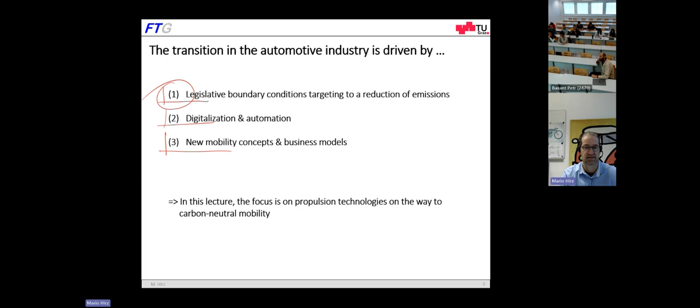Besides that, we have digitalization and automation. So automated functions, autonomous driving cars, for example. I will not touch that today. And the third factor is new mobility concepts. So new ways how to do transportation, people and goods transportation. And this changes a lot in automotive business. But today, I will focus on the propulsion systems. And this change of propulsion systems is driven by legislation. And I would like to start with this topic.

When we look at exhaust emission legislation, we can distinguish between the so-called harmful exhaust emissions. These are emissions that are bad for the health, bad for the environment in general. And then we have the greenhouse gas emissions, CO2. CO2 is not, in fact, harmful for the health, so we breathe it. So it's a part of the biocycle, but it leads to global warming, and therefore it's also restricted.

Perhaps some words in the beginning about the harmful exhaust emissions. Here we have hydrocarbons, we have carbon monoxide, we have nitrogen oxides, and we have particulate emissions. These emissions are initially targeting combustion engines because combustion engines produce such emissions. But in the latest European legislation, they also target all cars, so also electric cars.

But of course, electric cars have no hydrocarbons, right? They have no exhaust, they have no particulate, no carbon monoxide or nitrogen oxides. But electric cars also have particulate emissions, tire wear, and brake emissions. And this is covered with the new legislation, the Euro 7, this time.

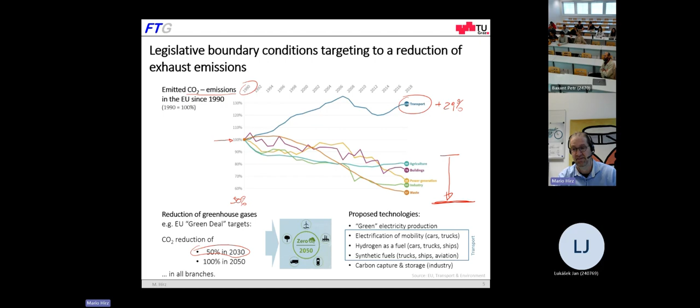And when we look at the transportation sector, we have about 5% railway, about 11% aviation, 11% ships, so naval industry, and about three quarters is road transport. And in road transport, a little bit less than half is the heavy-duty vehicles, so the trucks and buses, and a little bit more than half is the cars and motorcycles.

In that way, in a worldwide consideration, when we multiply the 23% with the 74, we have about 17% of all CO2 emissions coming from road transportation, and here a little bit more than half from cars and less than half from commercial transport.

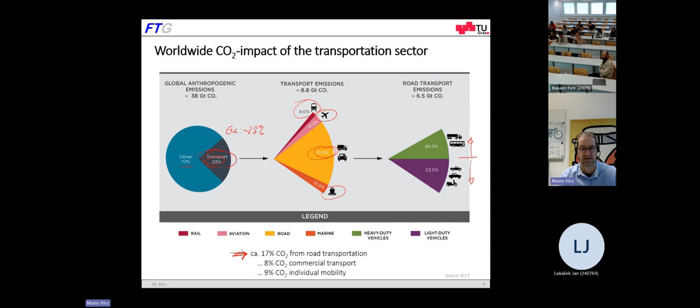Politics now applies measures to reduce the CO2 impact, and this is done by so-called fleet emission targets. What does it mean? This means that the fleet of cars which are sold in a year as new cars have to be on average below a certain threshold value. And as you see, for all markets worldwide, we again have a decreasing trend here. So even the United States or China have this, but the most strict regulation at this time we have in Europe with 95 grams CO2 per kilometer driven.

What does it mean? 95 grams CO2 per kilometer means about 4.1 liters fuel consumption gasoline or 3.6 liters fuel consumption diesel fuel per 100 kilometers. How this is calculated, I'll show you later. It's just a simple factor used here.

For 2030, we have the 59 grams target, and we see that these values are really small. So 2.6, 2.3 liters per 100 kilometers is not easy to reach with an average car. And this means we need electrification. So a certain share of cars have to be electrified to reach the target.

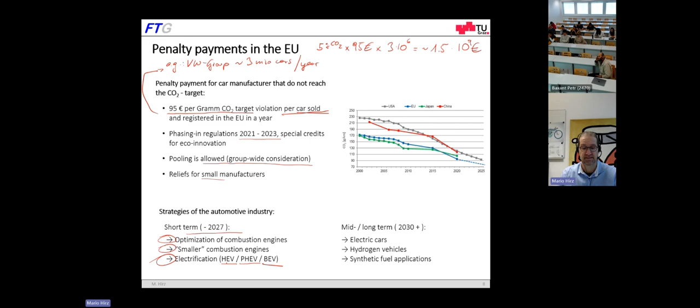And a main step is electrification. We have the HEV, the hybrid electric vehicles. We have the PHEV, the plug-in hybrid electric vehicles, where the battery can be charged on the grid, so you can plug in. And we have battery electric vehicles. These are the main strategies of the car manufacturers, so that the total fleet of their cars on average can reach this 95 gram target.

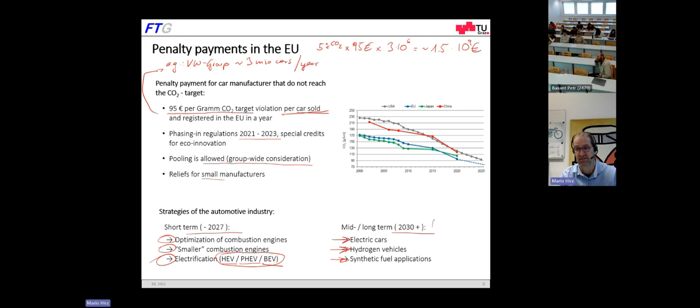On the long term, when we look at 2030 and beyond, there will be a significant move to electric cars because for zero CO2, electric cars will probably be the most efficient way. I will show you a diagram for that later. But we have alternatives. We can also use hydrogen-driven vehicles, and we can use synthetic fuels if the legislation allows this. I will treat all 3 technologies in my presentation today. Okay, so far the legislative boundary conditions in Europe.

Next, I would like to look into propulsion technologies. Before I start with that, I would like to talk about some basics. On this slide, we see the driving resistances of a car. You know that from physics, I guess. We have the braking force; I come to that later when we brake the car. We have the rolling resistance as a function of the rolling resistance factor and the mass of the car. We have the air drag as a function of the size of the car, the aerodynamic factor, and the speed squared. We have the climbing resistance when we drive uphill, and the acceleration resistance when we accelerate the car.

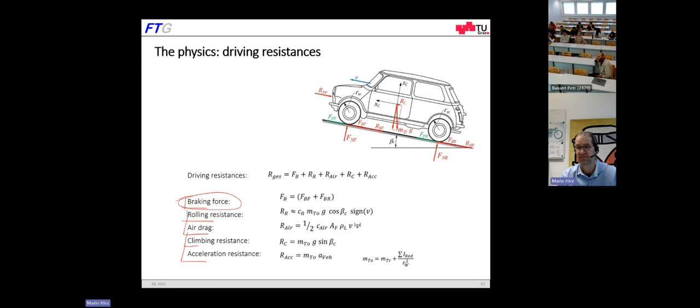Some of these resistances can be recovered during braking. When we brake the car, we have the possibility to recover some of that energy in case we have electric drive. Here is an example: a simulation of the driving power demand when we drive a standard car uphill with acceleration. We have the rolling resistance, the air drag, the inclination resistance for uphill driving, and the acceleration resistance. And in case we have a hybrid or an electric car, we can do electric braking.

And this is called recuperation. In this recuperation, the electric motor is operated as a generator. It produces electricity, and this can be stored in the battery. This significantly increases efficiency. So this is one reason why hybrid cars typically have a lower fuel consumption than cars with combustion engine only.

What happens with the energy in case of combustion engines only? The brakes dissipate the energy as heat to the environment. So it's not used anymore. It just heats the environment because of the friction brakes. But in case of electric powertrain components, the electric motor switched as generator and the battery, we can recover that energy. This has an important influence on the efficiency.

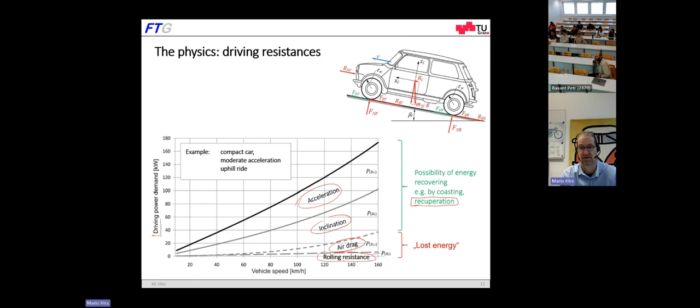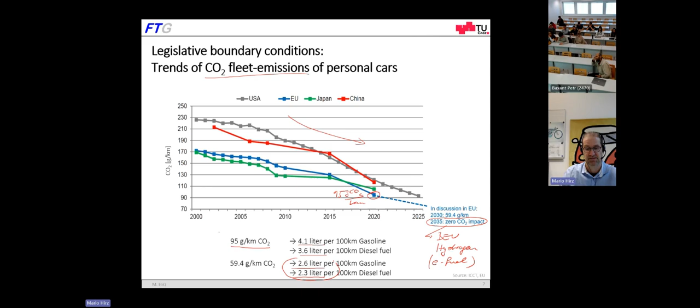So combustion engines are in that way a kind of limited technology that will not be able to reach zero CO2 emissions. In addition, we have the local exhaust emissions, I talked about that, and today the direct dependency on crude oil.

What about electric drives? Electric drives are much more efficient. I will show you later that we have a total efficiency in the range of about, let's say, 65 to 75% in total. That includes the charging and discharging losses of the battery, the electric motor, the gearbox, everything. And with that, we have a significantly higher efficiency potential than combustion engines. We have no exhaust emissions, and it's a quiet technology with high driving comfort.

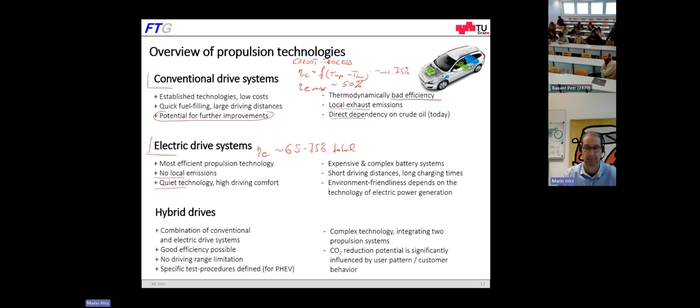The challenge with electric cars is the complexity of the battery system. I will show you later that the battery system is the most expensive part in an electric car. It requires high effort for production, and this is a challenge also in terms of CO2 emissions. We have shorter driving distances, longer charging times,

and as a very important factor, the environmental friendliness depends on the technology of electric power generation. When we charge the electric car with hydropower or solar energy, we have a very low CO2 impact. When we charge the car with coal power, we have a high CO2 impact. So it depends on how electricity is produced.

Finally, the hybrids. The hybrids are a smart combination of electric drive and combustion engine. As I mentioned before, a good efficiency is possible. We have no driving range limitation, and there are some specific test procedures defined in legislation for plug-in hybrids.

On the other hand, it's relatively complex, and the CO2 reduction potential is significantly influenced by how the car is used. In city traffic, the reduction potential is higher. When we only drive on highway with constant speed, there is nearly no CO2 reduction potential for hybrids.

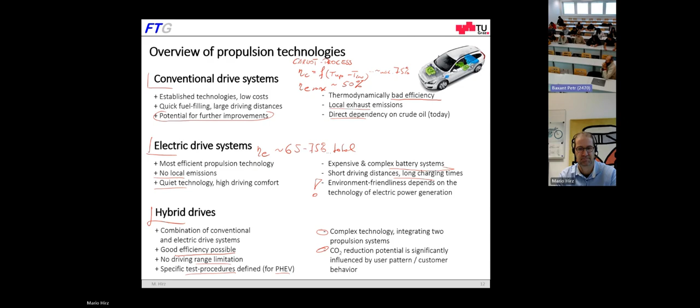In the serial hybrid, the combustion engine drives the electric generator, produces electricity, and this then drives the car. The car is driven by electric motor only. In the parallel hybrid, combustion engine plus electric motor drive the car. And we have a certain flexibility to operate combustion engine, electric motor, or both.

In the power split, it's the Toyota system, more or less. So Toyota has introduced that, very successful with the Prius, but in the meantime, they have it in different models. Here, we have a planetary gearbox that can switch very quickly between input and output, so from input from combustion engine or from electric motors. The advantage of this system is that it can very quickly vary the different energy sources for driving the car.

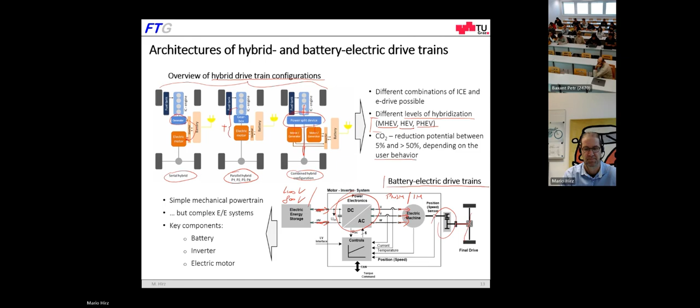But anyway, because of this limited speed range, we need a gearbox, right? So in a car with combustion engine, we always need to shift gears to be able to drive very slowly, but also fast on the highway. In addition, we need a clutch system here to start driving.

Why? Because at idle speed, we have a certain rotation of the crankshaft, but the wheels stand still when we stand still with the car. And to start driving, we need some friction mechanism that bridges that speed difference. Every time when we operate the clutch, we have losses. This is for starting driving, but also when shifting a gear. This is very different with the electric motor. The electric motor, as you know, as electrical engineers, delivers high torque at zero speed.

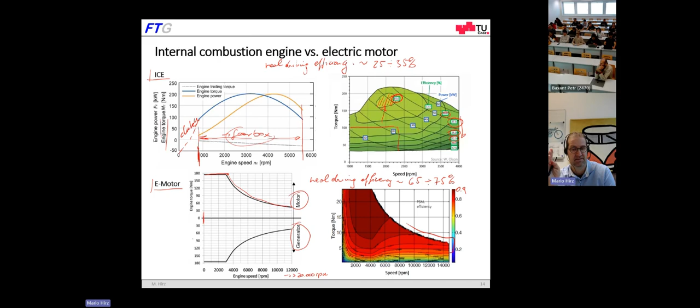In electric real driving, the efficiency of the complete powertrain, we can reach about 65 to 75 or even more percent. So it's about 2 to 3 times better than with combustion engines.

Another aspect when we compare combustion engine and electric drive is the mechanical complexity. So in combustion engine drive, we have a high number of mechanical components, about, let's say, 1,200 to 1,500 parts in the drivetrain. This includes the combustion engine with all the components, the crankshaft, the piston, conrod, valve train, oil pump, housings, and so on. It includes the gearbox with the bearings, the gear wheels, the shafts, the fuel system, and the exhaust system. So a high number of mechanical parts.

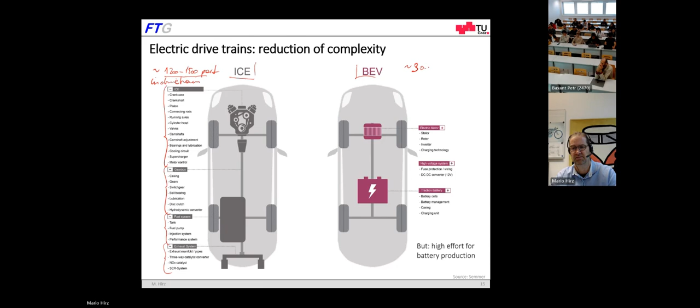For the battery electric car, we have about, it also depends on the complexity, 300 to 500 parts. So a significantly lower number of parts, which reduces mechanical complexity. We just have the electric motor with inverter, a simple gearbox, the battery system, the charging system. But, and I will come to that later, the battery is a highly complex component here. I will show you later.

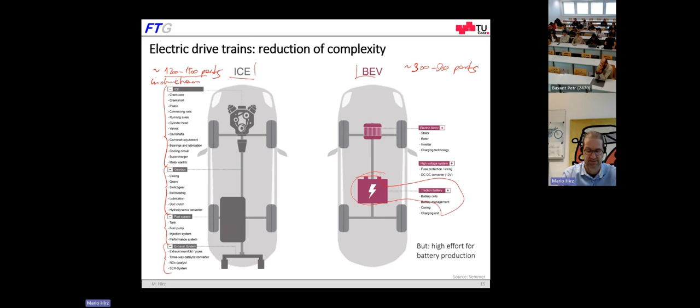So the combustion engine driven car will be a bit more expensive because of more complex technology for exhaust emission reduction, so that a difference of about 10% or something like that remains in 2030. This is only production costs. Of course we have other costs like maintenance, service, energy costs, and so on, which make battery electric vehicles very competitive in the near future.

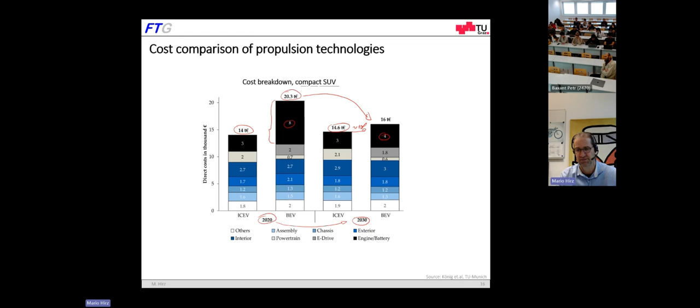Just to show you this expensive and complex battery system, this is an example of the Porsche Taycan, a luxury sports car. Here we have a battery of about 94 kilowatt hours energy storage capacity. It's an 800 volt system. We have here 33 modules with 12 cells.

I just want to show you the complexity. So we have here the modules with the cells. We have the electric connection, high voltage connection. We have a battery management system, a very complex control system of the battery. And you see here, we have extensive protection.

This is one disadvantage of the lithium-ion battery. They burn very well in case of an accident, for example. And therefore, we need massive protection. So these are aluminum beams. Also here in between, we have underbody protection from the lower side. We have different covers. This is the cooling system here visualized. So it's a complex, very expensive system that is represented in such an automotive battery.

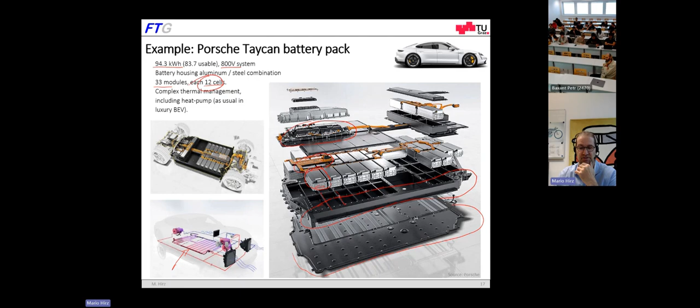Regarding battery systems manufacturing, we have another situation that is important, namely the supply of battery cells. About 50 to 60% of the price of such a battery is only the cells. So these are the cells which are here in the modules, and they are very expensive to produce. So more than 50% of the battery is only the cells.

And when we look at the supplier companies that are able to deliver automotive battery cells, we see there is a small number of them. The largest one is CATL, a Chinese company with more than 25% market share. LG, Korean, with also about 25% market share. So these two have 50% market share. Then there's Panasonic, Japanese, Samsung, Korean, SK, Korean, BYD, Chinese, and some others.

And when we look at this, we have here 5 or 6 manufacturers which have more than 80% of market share. And what's also visible, all these companies are Asian companies. So we do not have European companies for battery production. And this is a very bad situation. So we have to import this know-how to Europe. In the meantime, these manufacturers also have cell production in Europe, but most of the cells are imported from Asian countries. So this has an economic impact.

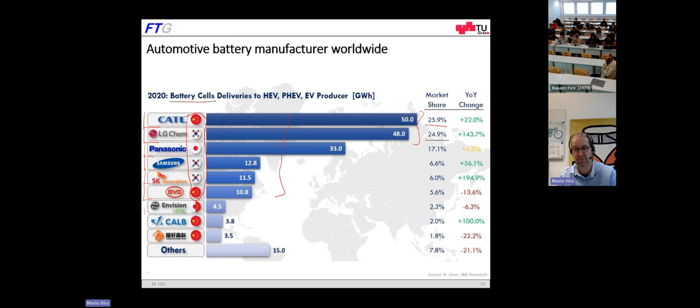Let's look at the CO2 emissions. I want to compare the different technologies in terms of their CO2 emission impact. And here we have to distinguish between 2 types of CO2 emission: the so-called well-to-tank emissions and the tank-to-wheel emissions. How does it look? When we have a car with a combustion engine, here on the upper line, we have tank-to-wheel emissions because we drive the car and we burn the fuel. I have shown you in the introduction how it works, where it comes from. So when we burn hydrocarbons, we have a CO2 impact.

In addition to that, we have to consider the different steps of production of the fuel, right? So we have the production of crude oil, we have the transport, we have refining, and the transport to the gas station. This is the so-called well-to-tank emissions. Just to give you an average, the well-to-tank emissions for gasoline and diesel are about 15 to 20% of the tank-to-wheel emissions. So this is the effort for production of fuel.

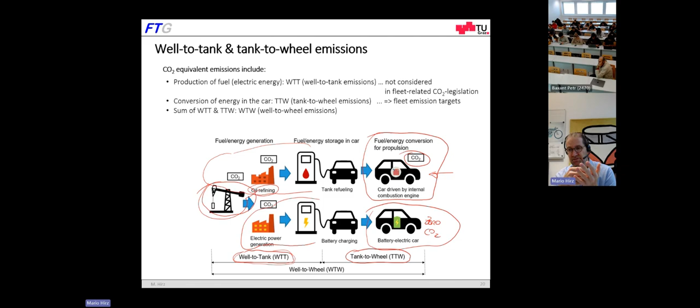In case of an electric car, we have 0 CO2 tank-to-wheel. That's clear because an electric car has no exhaust, right? But we have well-to-tank emissions, and this is influenced by how the electricity is produced. I will come to that in more detail on the next slide.

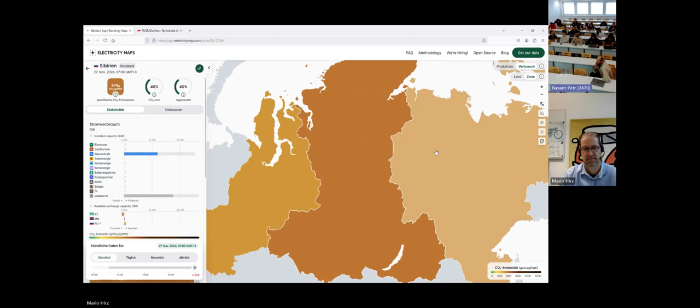And what I want to show you is the information about real-time data. There are different sources available. I would like to share that on the screen. Let me see if it works. I just want to start my browser. Give me a second. Here, it works. I have this link in the slide. I change my screen. Can you see my browser screen? Yeah. Okay. And it is this Electricity Maps link.

And when we look at that, we see in real time the electricity mix. So when I go to Czech Republic, for example, I see here we have biomass, hydropower, nuclear power, and coal power. So in total, we have 600 grams per kilowatt hour in Czech Republic today. In Austria, we have 365 with different power sources. In France, we see a high share of nuclear power and so on.

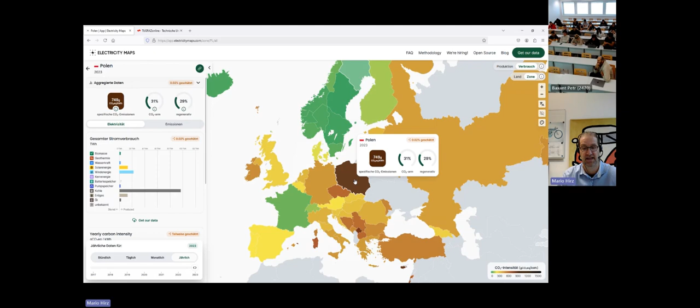If you are interested in seeing the electricity mix in Poland, 749 with a high share of coal power. There are several countries worldwide where you can get the data of electricity production of today. They also provide annual data, so we can look at the annual average numbers and other ones.

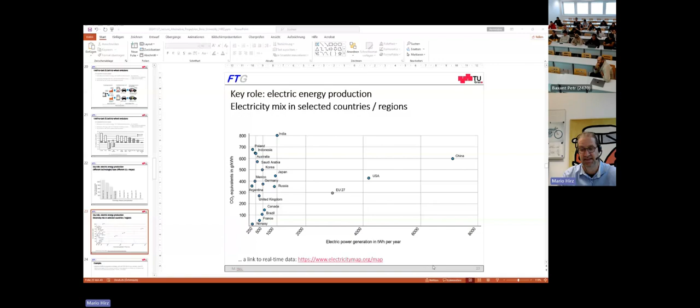Okay, at the end, I just wanted to show you that how electricity is produced has a big impact on the sustainability of electric cars. Let's do an example. I will just do a simple calculation here to compare, let's say, a diesel car or gasoline car with an electric car. So I start with, let's say, a diesel car.

We assume a fuel consumption, just take a value, 5 liters per 100 kilometers. Out of that, we can calculate the tank-to-wheel emissions. So I just jump back to show you. This part here we can calculate by a factor. So the tank-to-wheel emissions equal 5 liters per 100 kilometers multiplied by a factor, and the factor is 26.2. For gasoline, it's a slightly smaller factor because gasoline holds less carbon. So I calculate 5 multiplied by 26.2. It's 131

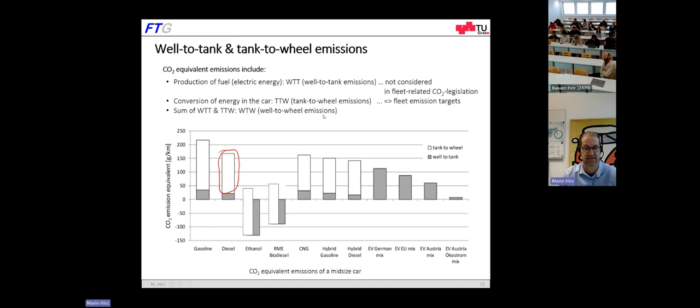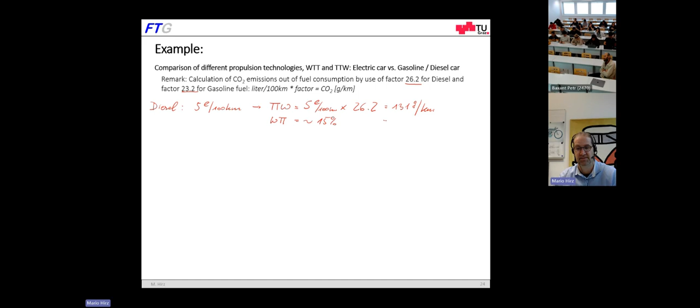grams per kilometer. In addition to that, we have to consider the well-to-tank emissions. I just estimate that. I go back to my diagram. So it's this part here, and I estimate that at about 15%. So multiplied by 0.15, it's about 20 grams per kilometer. So in sum, well-to-wheel, we have in total 151 grams per kilometer when driving a diesel car with a fuel consumption of 5 liters per 100 kilometers.

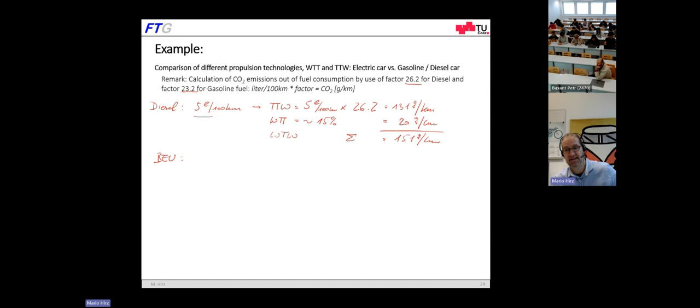For a battery electric vehicle, first we have to assume an energy consumption. Just to take an average value, since it depends on the size of the car and the efficiency, we can assume, including charging losses, for a simple calculation, about 20 kilowatt hours per 100 kilometers.

And now we can calculate the electric impact. For example, in the Czech Republic, we had today on the electricity map, I just go into the internet, let me see, about 600 grams CO2 per kilowatt hour. This is the electricity mix in the Czech Republic. Out of that, we calculate 20 multiplied by 600, divided by 100 because we calculate per kilometer. So this is 120 grams CO2 per kilometer.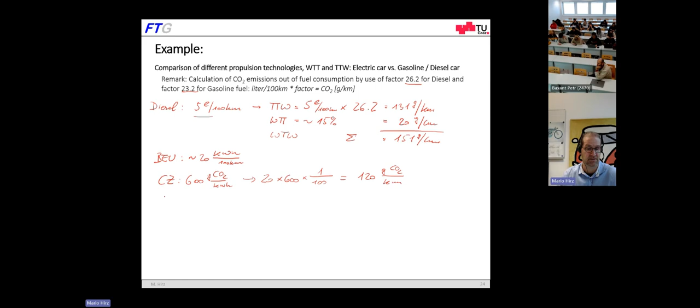If we drove the car in Austria, looking at the electricity map, we have 300 grams per kilowatt hour. So this would lead to half, about 60. Or if we drove it in Norway, we have 25 grams per kilowatt hour, so very low. When we calculate that, it's only 5 grams per kilometer. It's just playing with numbers, but I want to show you that the technology of electricity production influences a lot the CO2 impact of an electric car. When you charge it with solar power or water power, you have a very low CO2 impact.

Did you understand? Do you have some questions about that example? It's okay, but it's only the use of the car, not manufacturing. Yes, absolutely right. About manufacturing, I will talk in my next chapter. So thank you very much for that input.

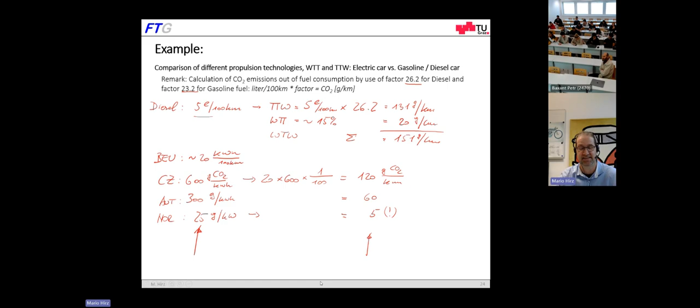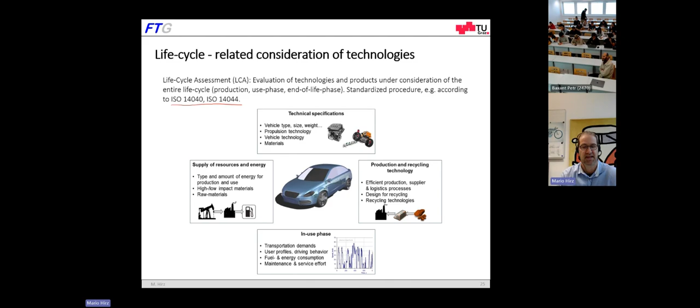Okay, this is the next chapter: what about the life cycle consideration? Life cycle consideration means we also consider manufacturing and recycling. This life cycle assessment is a standardized process; there are ISO standards for that. It includes the complete consideration of the technology. In the beginning, we have energy and natural resources. This includes material production: extraction of raw materials, processing, refining, and transportation of all materials we use in cars, steel, aluminum, plastics, copper, and so on.

Then it includes vehicle manufacturing, where the modules are manufactured, the vehicle is assembled, production processes, logistics. These two factors are the production of the car. Then we have the usage of the car with the well-to-tank and tank-to-wheel emissions. This is exactly what I calculated before. We have maintenance and user behavior. So here we have the use of the car. And at the end, we have the end of life: recycling, material extraction, thermal usage of materials.

All three components, production, usage, and end of life, are considered, and I will show you some results on the next slide. We can calculate different parameters, energy demand, water demand, and so on, but I did it with the CO2 equivalent emissions because they are the most popular and most important today.

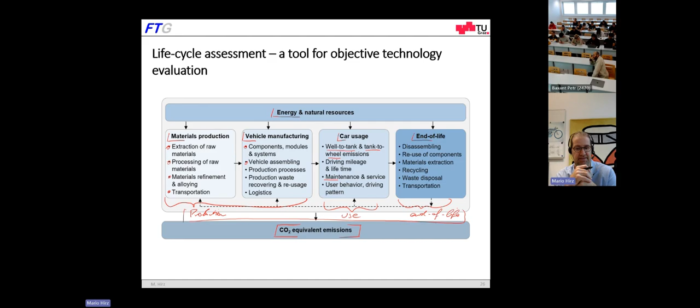Let's have a look at the different technologies. So when we do such a production comparison, so only the production, we see that cars with internal combustion engine here are set as 100%, and electric cars, to start with them, have about 50 to 100% higher CO2 impact in production. The vehicle is nearly the same. There is not much difference.

There is the electric powertrain, of course, electric motor, inverter, but the most impact has the battery, with about 50% is the battery. In that way, this range here is indicated because it depends on the size of the battery. When we have a smaller battery, the impact is lower. When we have a large battery, the impact is higher.

For hybrid cars, it is much dependent on the battery size here. So for mild hybrids or hybrids with very small battery, it's nearly the same as with combustion engine cars. But for plug-in hybrids, we have a larger battery, 10 kilowatt hours, 15, even more kilowatt hours, so that the CO2 impact of production can be about 50% higher than those of a standard car. This is just the first estimation of that impact.

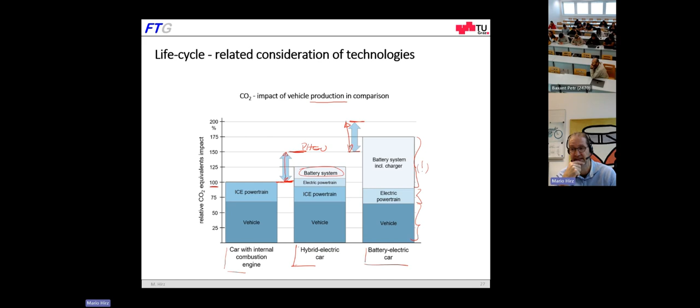We have done that much more detailed, and I would like to show you some results here. So we have analyzed an electric car. It was the Volkswagen ID.3, where we have made a very detailed analysis of production. So this is only production of this car. We analyzed the bodywork, exterior, interior, electrics, chassis, and powertrain, including battery.

And we see that in total, I just write it down here, we have about 14 tons CO2 in the production of this car, with about 50% only the battery. Then we have the bodywork, so it's the steel. We have the electric powertrain with the copper and all the components, the interior, the other electrics, and so on. But about 50% is only the battery.

And when we look at the materials that are used here, we have about 30%, a little bit less, 28% is only the battery cells. Then we have steel, we have electrics for high voltage and low voltage, aluminum, and others. Why is the battery so important for the CO2 footprint of production? I have it here on the next slide.

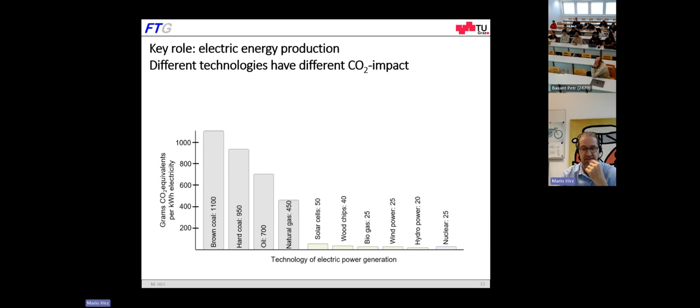And when we now go back to the slide of electricity footprint here, most of the battery cells today are produced in China and imported from China. So when you buy a BMW or a Volkswagen or Mercedes, there is a high probability that the battery cells come from China. And what we see here, we have a high impact electricity in China.

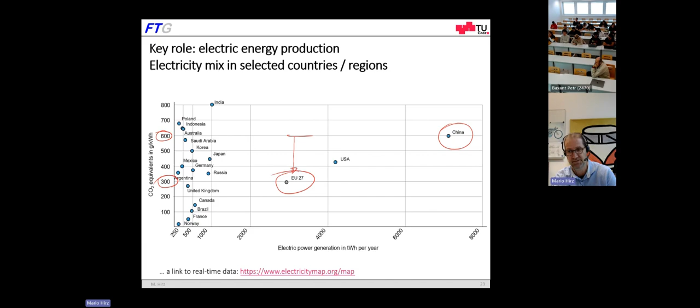That's the problem. When we can reduce the CO2 impact, for example, to European mix, so we produce the cells in Europe and not in China, we can reduce that to a half only by changing the electricity mix. So electricity production has a main impact also on the production of electric cars. Yeah, so far this was the production.

Now about the usage. So when we use the car, we have a certain energy consumption for driving. Of course, this depends. So for this compact car, in average, it was 16 kilowatt hours. Larger cars, SUVs, can reach 20, 25. I tested the Audi e-tron last week. We had 30 kilowatt hours energy use on a highway. So it depends a lot.

Then we have auxiliary devices. This is, for example, heating in winter times, so heating the passenger cabin, or the light or hi-fi equipment and others. It's about 10%. And we have charging losses. I just want to point out the charging losses because they are often neglected.

So for low power charging, we have about 95 to 98% efficiency. So for low power charging at a wall box overnight, you have very high efficiency, low losses. But for high power charging at a supercharger, we have efficiency of about 80 to 85%, perhaps 90%, something like that.

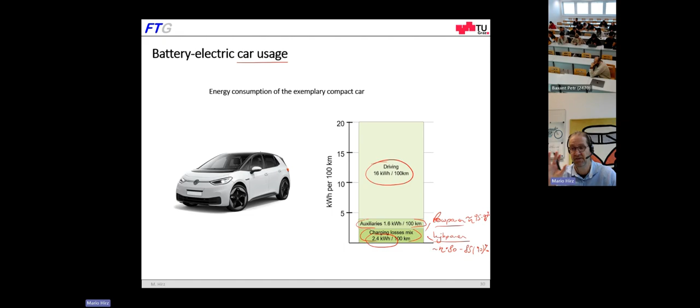And what we've done next is to calculate the entire life cycle of different cars. So we had here a car with combustion engine. By the way, it was a BMW 1 Series with gasoline engine, 90 kilowatt, a standard compact car. We had a hybrid car, a Toyota Prius hybrid, and an electric car, the Volkswagen ID.3 as shown before.

And we calculated both the production CO2 impact and the usage. In production, we had 7.5 tons for the car with combustion engine, 9 tons CO2 for the car with hybrid drive, and 14 tons for the electric car I showed you before. The car with combustion engine has a fuel consumption of 6 liters, the hybrid 4.5 liters, and the electric car 20 kilowatt hours per 100 kilometers.

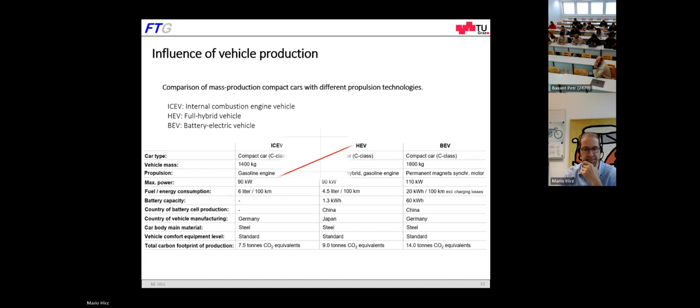When we put these results in a diagram with the CO2 equivalent emission in tons over a driving distance, and we assume 200,000 kilometers, we see the 7.5 tons of production of the car with combustion engine. And due to the fuel consumption over driving, it ends up with 40 tons over 200,000 kilometers. Also included here is maintenance and service, but the impact of that is very small.

When we take the hybrid, we have the 9 tons in production. We have a lower fuel consumption, 4.5 liters per 100 kilometers, resulting in 33 tons in total CO2 emissions. For the electric car, it depends a lot on how electricity is produced. We have the 14 tons of production, that's clear. And then it differs. When we use the car in Norway with hydro power, we have a very small CO2 footprint of 16 tons.

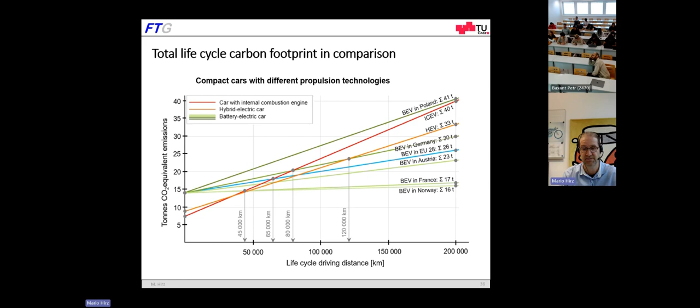But we can now calculate a break-even point. When comparing the car with combustion engine and the electric car with low impact electricity, the break-even point is at 45,000 kilometers, so about three years of usage. When we compare that with the European energy mix, we have 65,000 kilometers, or in Germany, 80,000.

A little bit more tricky is to compare the hybrid, which is very efficient, in the German electricity mix. Here it's 120,000 kilometers for the break-even point, very late in the life cycle of the electric car. So to summarize, when looking at electric cars and also considering their production, the electricity technology is the main factor in whether electric cars are lower CO2 than combustion engines or not.

Was there a question? Yes, I would like to ask, it's only the point of view of CO2 production and not about local emissions like nitrogen oxides and small particles and so on. Usually in public we speak only about global CO2 emission, not about local emissions in the cities and the impact on health, for example.

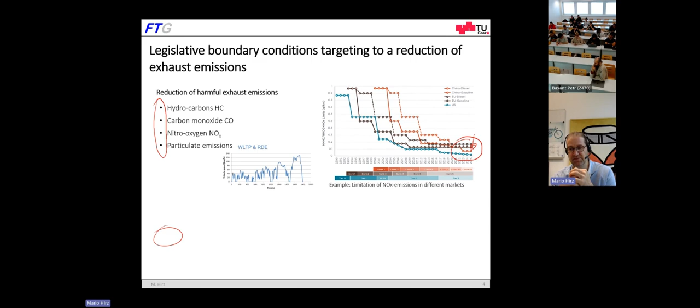And today, these harmful emissions are a very small percentage. In old cars not, but in modern cars we can reduce them technically. But for the CO2 emissions, we only have limited possibilities to reduce. In that way, the CO2 targets are seen as the highest challenge to reach.

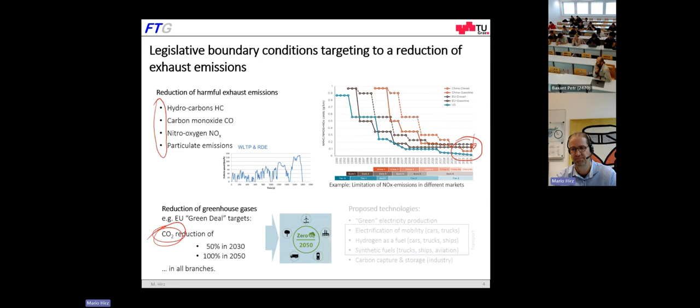Also, I agree that water contributes to the greenhouse gas effect, and there are other gases like methane and others. But CO2 is seen as a very relevant source that we have and that we should reduce. In the study I show you today, I just focused on CO2 emissions. But I agree, yes, there are also other gases.

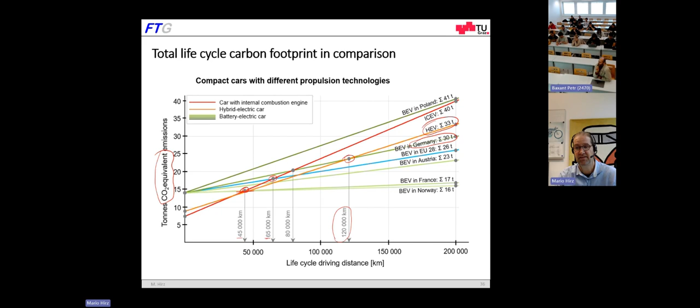So we have about 10 minutes, I think, or 15. I have some more slides. If you agree, I would like to talk about alternative fuels. I will do it very quickly.

The first one is hydrogen. What about hydrogen? The advantage of hydrogen is that we don't have carbon inside, so it does not produce CO2. And hydrogen can be used in a closed cycle. We can produce hydrogen out of water. We can store hydrogen in tanks, typically 700 bar tanks, so very high pressure. And we can use it in combustion engines or in fuel cell systems to produce electrical and mechanical energy. With this, we have a cycle process. This is the big advantage of hydrogen.

But, and now comes the but, this only works when we use water as a source of hydrogen. But today, about 95% of all hydrogen that we have on Earth is made from natural gas. Natural gas is mainly methane, CH4. For time reasons I don't go into detail too much, but we see here with CH4 we have a lot of hydrogen, right? And we can separate that very cheaply and easily from methane, but this produces CO2. So it's not CO2 neutral.

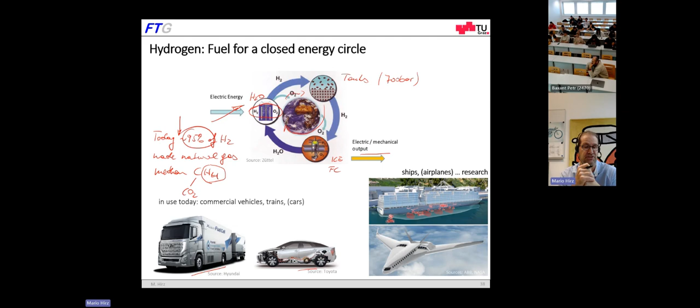And the biggest challenge that we have with the whole hydrogen economy is to shift that 95% to electrolytic hydrogen, so made of water. This is the main task. All the others, applications in trucks, even some cars, or other applications, will work when we can establish a green hydrogen community. This is the most important factor here.

Here I have just prepared some information about hydrogen fuel cell vehicles. I will not go into detail due to time reasons, but hydrogen is very expensive today. And it has a CO2 impact when it's made from natural gas. So we need to go to renewable, solar or wind energy to produce hydrogen to come to near zero. This is the hydrogen story.

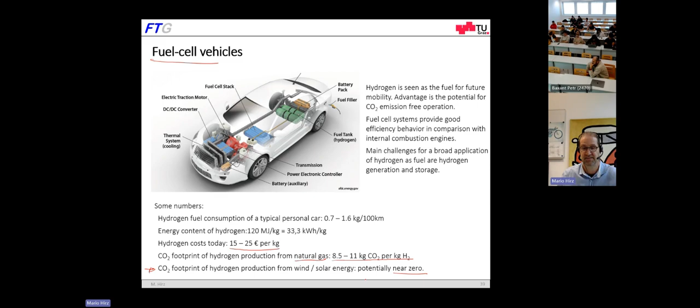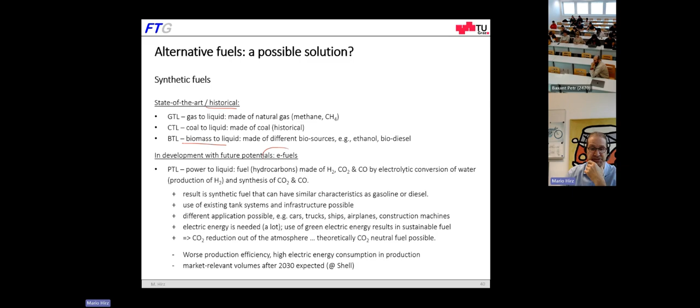The other one is e-fuels. We have different types of chemical fuels. We can use biofuel, we talked about that. But today, much in discussion is the e-fuel. What is the idea? The idea is to take CO2 from the atmosphere and use electric energy for a synthesis process of hydrogen plus CO2 to then have hydrocarbons, HxCy, as I mentioned before, as e-fuel.

And the idea is that we take the CO2 from the atmosphere, we produce fuel, we use it to drive cars, and then we burn the fuel, and at the end CO2 is released again, which also enables a cycle. In theory it works, and there is also a prototype power station in South America, in Chile, but it's very expensive. Just to give you an idea, for 1 liter of e-fuel we need 3 liters of water.

We need about 6,000 cubic meters of air for CO2 extraction and 16 kilowatt hours, I would say even a bit more. It depends on the calculation; I would say about 20 kilowatt hours. And this results in 1 liter of fuel with 8.5 kilowatt hours of energy content.

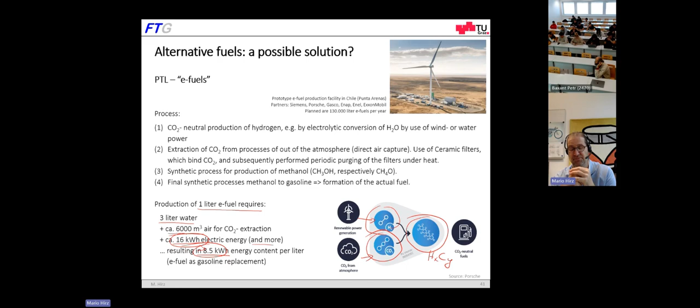So we have a huge effort. We have efficiency of less than 50%, or about 50%, because we need 16 kilowatt hours of electricity to have 8.5 kilowatt hours of energy content, right? And this, of course, makes it very expensive, but in general, it works.

And at the last slide, and this is my last slide of today, I would like to discuss the 3 technologies that we have available for driving cars and trucks, for propulsion. The target is 0 CO2. And here we can use electric cars, battery electric vehicles, with green electricity, of course, so low CO2 impact electricity. We can use fuel cell electric vehicles with hydrogen, and the hydrogen also produced by green electricity, so not methane, green electricity.

Or we can use internal combustion engine vehicles, and the e-fuels also produced with green electricity, right? So all 3 of them are more or less low carbon because the basis is green electricity or low carbon impact electricity. And what we compare here is well to tank, so preparation of energy or fuel, and tank to wheel efficiency.

In case of the electric car, we have the electricity, green electricity, and we have some losses for transportation of electricity, right? So over distance. This leads to about 95% efficiency at the charging station. Then we have the charging station here. It's assumed with about 5% losses. It's very optimistic, but anyway, we have the battery charging losses about 5%. And then we have the inverter and the electric motor. I have to say, this is a bit optimistic. So I would say in real, we can reach about 65 to 77% total efficiency of this system.

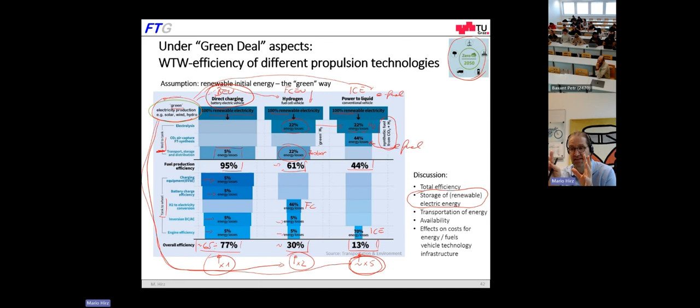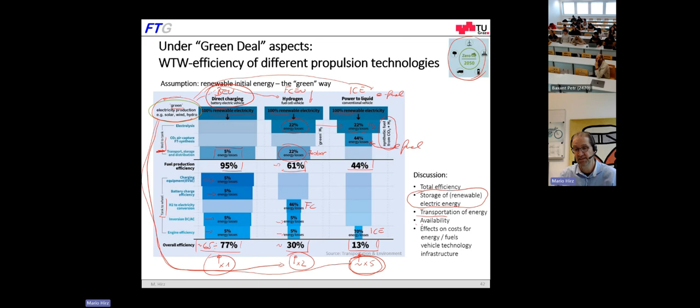Not considered in this slide is the storage of electric energy. It might be necessary to find technology to store renewable energy, wind energy, solar energy. So this can change these values a bit, but not a lot. The transportation is a factor, availability of e-fuels, for example, and of course, the infrastructure is also a factor not considered here.